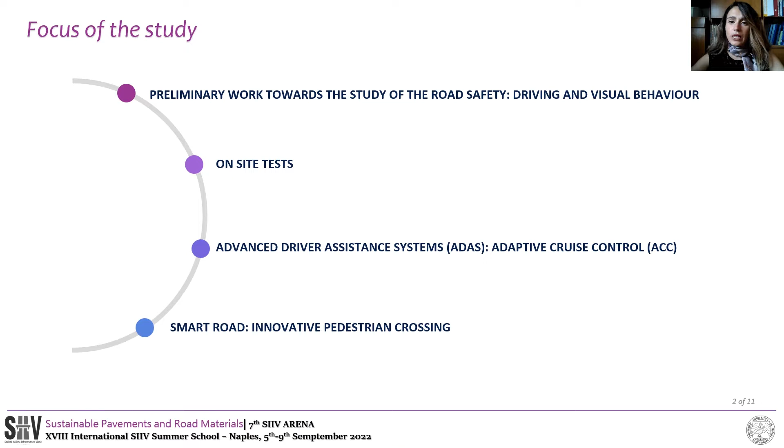The focus of the study falls within the preliminary analysis of road safety, considering the driving and visual behavior, the three on-site tests, the evaluation of the new systems called ADAS, in particular the adaptive cruise control, and finally the description of a specific infrastructural element of the smart road, that is an innovative pedestrian crossing.

Three important on-site tests were conducted. The first concerns the relationship between driver and vehicle, including the influence of the adaptive cruise control. Test 2 deals with the driver-road interaction. Finally, test 3 describes the interaction between drivers and the innovative pedestrian crossing. The aims of the tests are the analysis of driving, visual, and vulnerable road users' behavior.

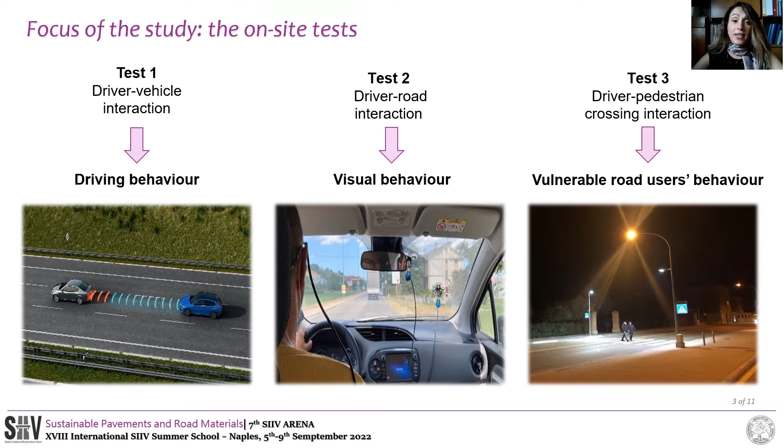The first test is localized in the Tangenziale of Bologna. Thanks to the use of the VBox tool, which allows monitoring the kinematic parameters of the vehicle, it was possible to record the influence of the adaptive cruise control. In fact, this system emits electromagnetic waves that localize the previous vehicle in the same lane.

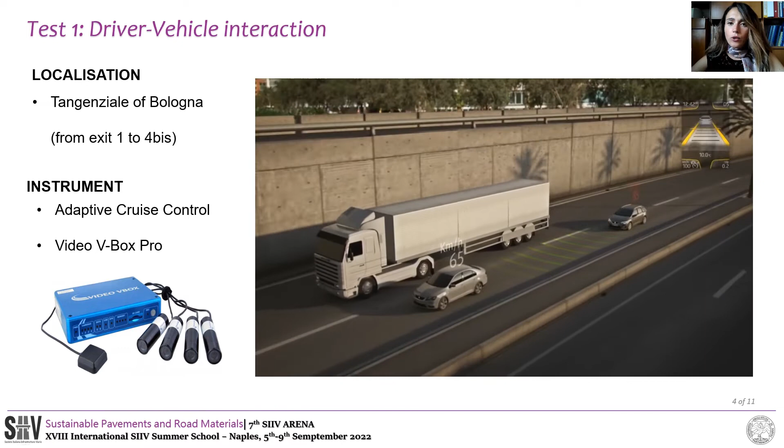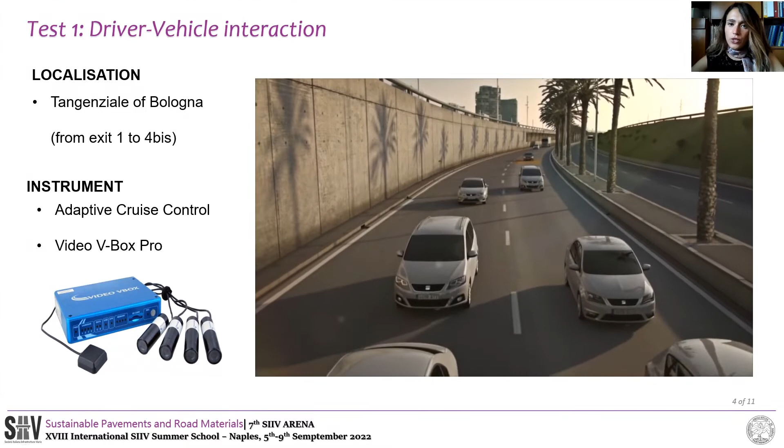The vehicle automatically adjusts the speed by setting a minimum distance. When the vehicle finds the clear lane again, the ACC increases the speed up to the set limit. In case of queues, the ACC manages to decelerate the vehicle until it stops completely.

To test the driver-road interaction along the Forlivese Street in Tavullia, the mobile eye tracker was used. This tool is designed to monitor the movements of the pupil with the spectacle-mounted unit. This element consists of two cameras mounted on special glasses. One is focused on the eyes and one on the external environment. The output is the video with the red cross, as we can see, which represents the point of view of the drivers.

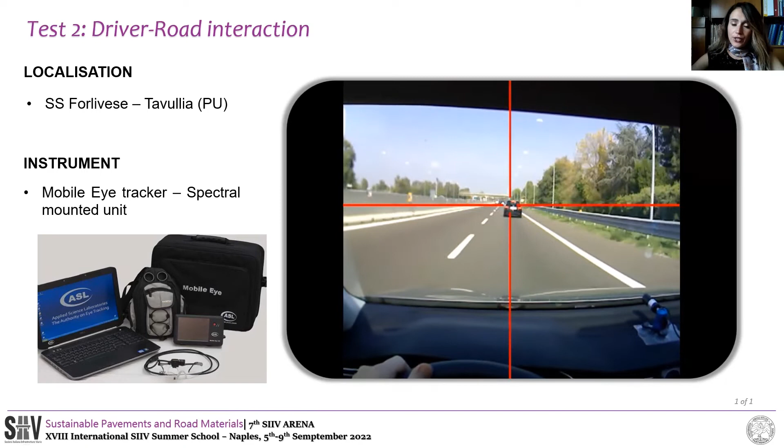In test 3, the innovative pedestrian crossing located in Via Andrea Costa was analyzed. It consists of bright LEDs inserted in the sidewalk, a sign indicating the crossing, and a light pole, in addition to the public lighting. The monitoring system is composed of one video camera for each direction of travel.

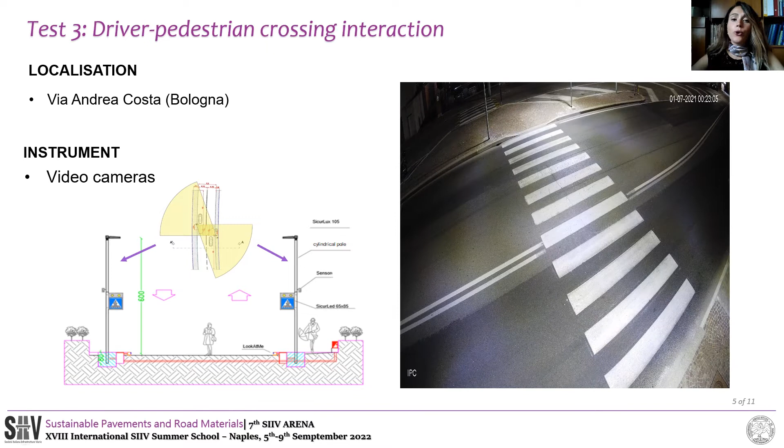The result of test 1 allowed describing the driving behavior. It consists of the perception reaction time, the average speed, and the average minimum distance between cars. The first graph in particular shows the trend of the speed and the acceleration. In this way, it was possible to underline the range of the perception reaction time.

In fact, it starts with the yellow line, when the user observes the previous vehicle braking. It is possible to identify this yellow line thanks to the use of the mobile eye tracker. And the red line, which represents the end of the PRT, establishes the time when the test vehicle brakes.

When the ACC is turned on, the PRT is greater for both ACC users and non-users, as we can see in the graph below. The average speed shows lower values with the system on for both types of users, while the minimum distance is greater with the ACC active.

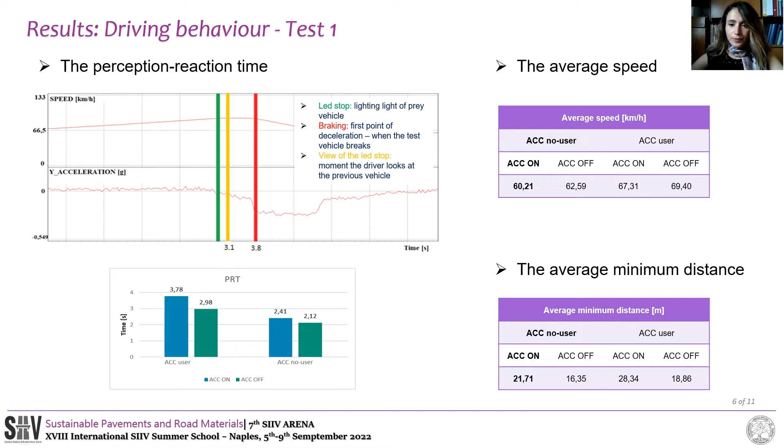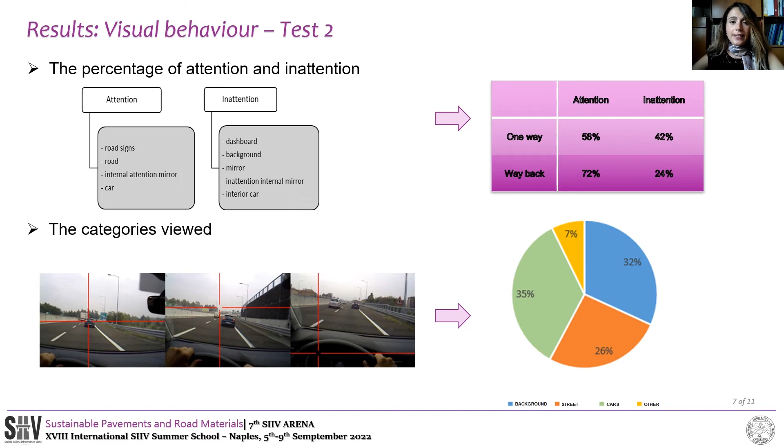The visual behavior of the second test is connected with the percentage of attention. This element was extrapolated by the count of the frames recorded during the video, establishing two macro categories, attention and inattention. The attention in this case is higher with respect to the inattention, and it is specifically connected with the categories of street and cars.

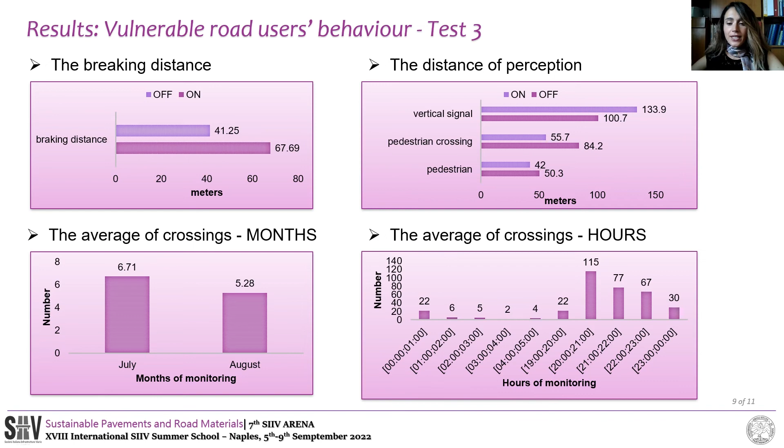The vulnerable road users' behavior underlines that the braking distance is measured when the system is active, and the vertical signal is the first element seen in the pedestrian crossing. The graphs also show the average of crossings, considering the months of July and August, and a single day, to establish a precise trend in these two different times.

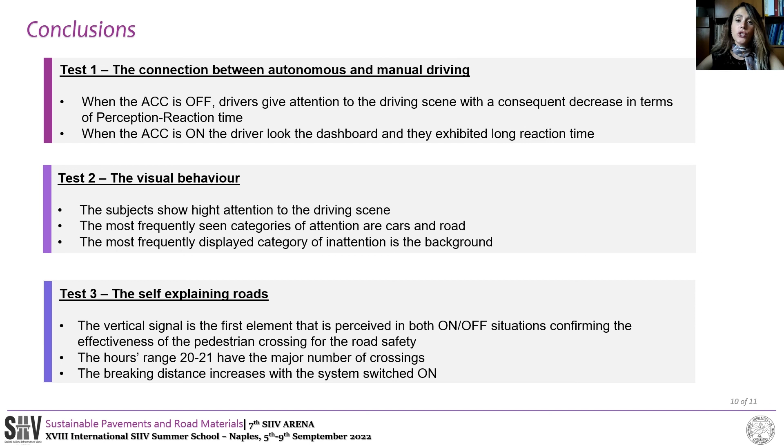Also, in the third test, the system installed in the pedestrian crossing is effective for road safety because the braking distance increases when the system is turned on. Thank you for your attention.